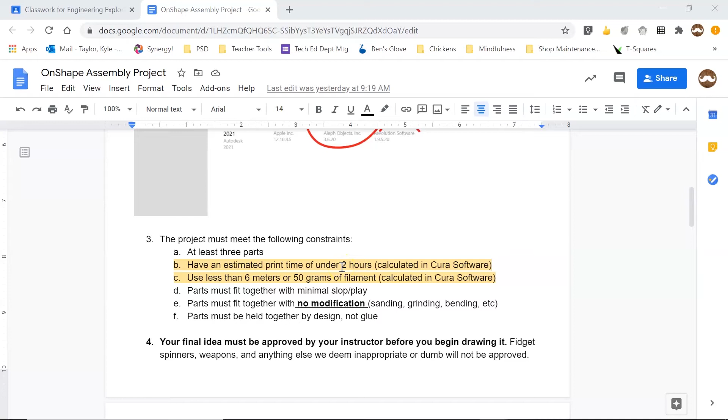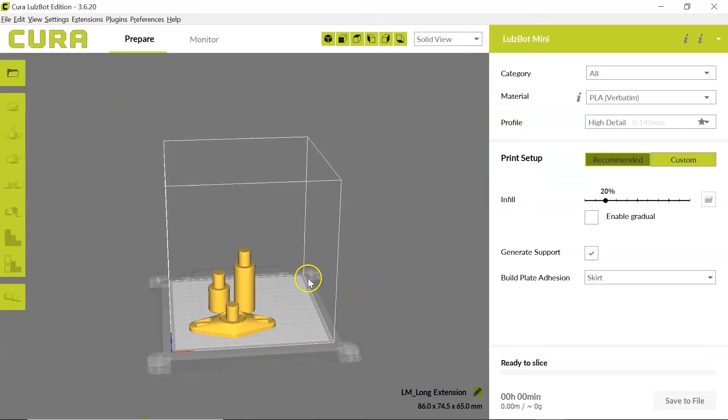So let's jump over to Cura and take a look at how to load those files in and then resize them. So here in Cura, I have my window open. I need to open a file, and I am going to navigate to a folder where I have STL files located. And all of these files right here are STL files. And so I'm going to just select a couple of them. And I'm going to click open, and it's going to bring them into the print bed window so that we can start manipulating them.

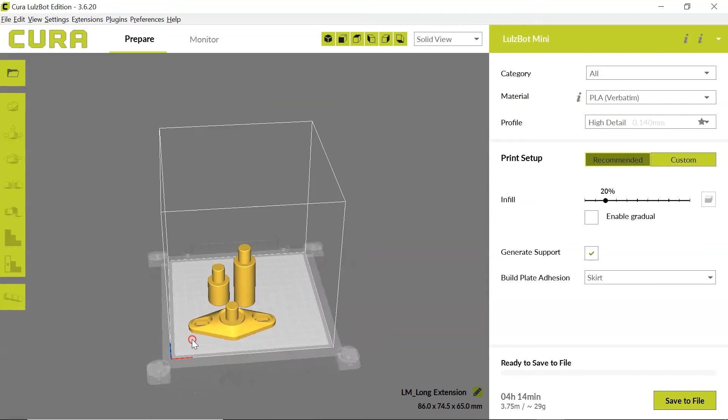Now, some controls inside of Cura. To orbit around your view, I'm clicking and holding the right mouse button. To zoom in and out, I'm using the scroll wheel. And to pan, I'm clicking and holding the scroll on my mouse and then moving back and forth. Clicking the left button and dragging doesn't have any effect on our view.

So now, looking at these three objects placed as they are, I can see the amount of filament and the length of time that this print is going to take. So currently, I am at a 4 hour and 14 minute print time. Okay. 3.75 meters of filament, approximately 29 grams. So I'm under the requirement for the amount of filament, but I'm way over on the print time. So some things that I can do to get that print time down.

First of all, I need to make sure I have the correct filament selected, and we use PLA for this project. And I'm actually going to change this from high detail to standard, and let's watch the effect that it has on our print time. So it's slicing, and by simply switching from high detail to standard detail, I've gone from over 4 hours to just over 2 hours. So this is a much more appropriate print time. Now I still need to get this down about 20 minutes.

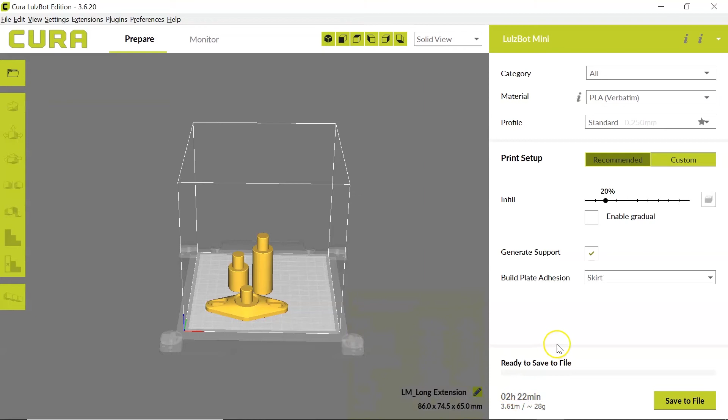And so what I'm going to do is I'm going to scale my objects. And it's important when we do this that all three objects get scaled at the same time and in the same amount. Because if I only scale one object down, then my pieces are not going to fit together correctly. So I'm going to start with this tall post right here, and I'm going to click on it. And then I'm going to use my scale button here. And it's important to have uniform scaling selected. And what that's going to do is if I change one of my values, either X, Y, or Z, it's going to keep the other values locked at the same ratio.

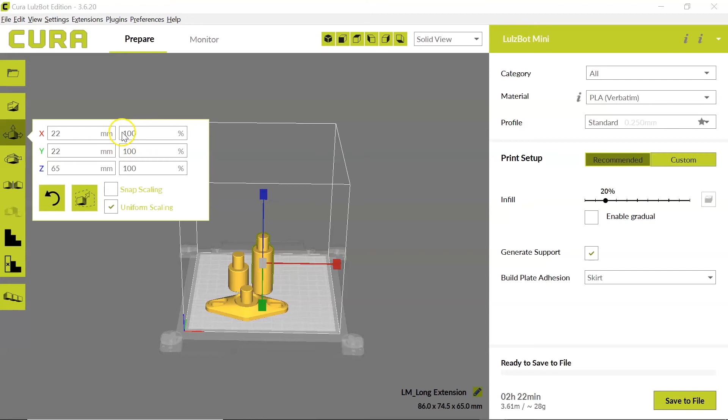So I'm going to go ahead and scale this post. And I want to use the percentage scale because this is going to allow me to scale all three objects the same amount. And we only need to reduce our print time by 20 minutes. So I'm going to scale this one to 98%. And when I click enter, you can see it changes all of the other dimensions. And now it's reslicing my object. And that took 3 minutes off my print time.

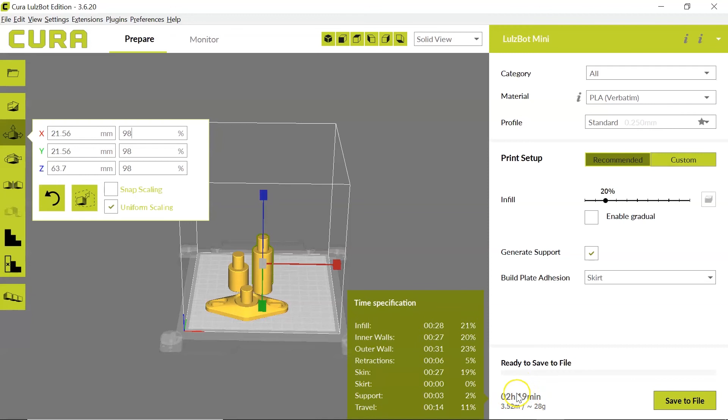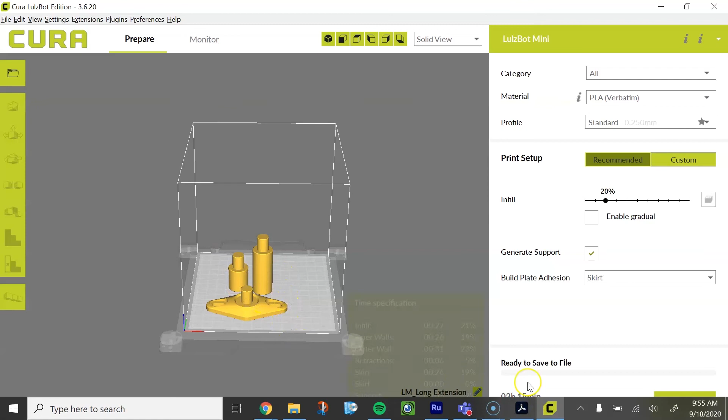So let's scale my others also to 98%, making sure to get all three objects. And we'll let it slice now that all 3 objects have been scaled, and look at our print. So this brought us down to 2 hours and 15 minutes. We need to go a little bit smaller. So let's go to 95%. And we'll let it slice and check our time. 2 hours and 7 minutes.

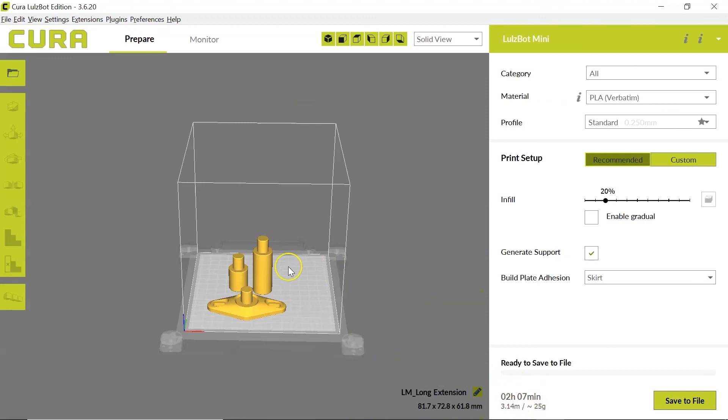We need to go just a little bit more on our scaling. So we'll go to 92%. And we'll let it slice, and this should bring us down under 2 hours. 1 hour and 59 minutes. So these are now scaled to an appropriate time where I meet the time limit of 2 hours or less and the filament requirement of 6 meters or less. So these are now scaled correctly, and I'm ready to save these for export. And we'll take a look at saving and exporting in the next video.